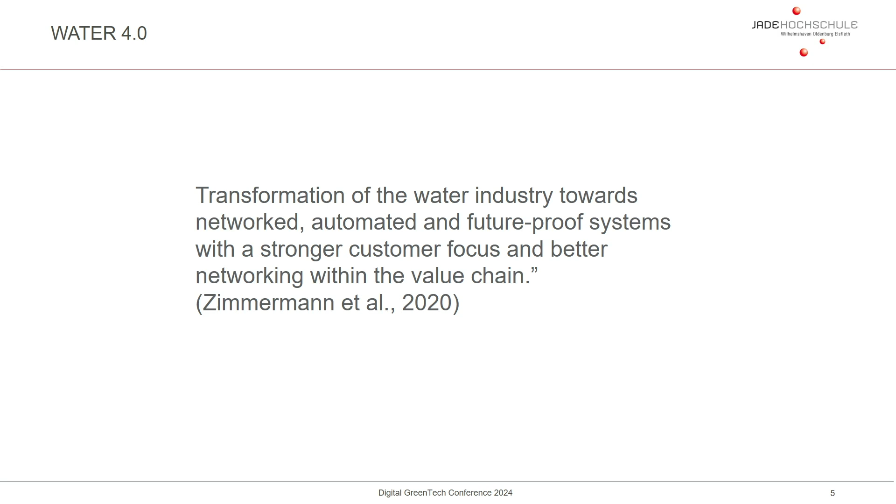And why do we talk about digital transformation of those urban water systems? Let's see a short definition. It's often talked about as water 4.0. And it is the transformation of the water industry towards connected systems, towards digital systems. And the idea is to have a stronger customer focus, to have better networking within the value chain. And the goals are to have a better linkage between plant processes, to have better speed, to consider all resources, personnel, material, and support processes, all towards the goal of having better environmental technologies.

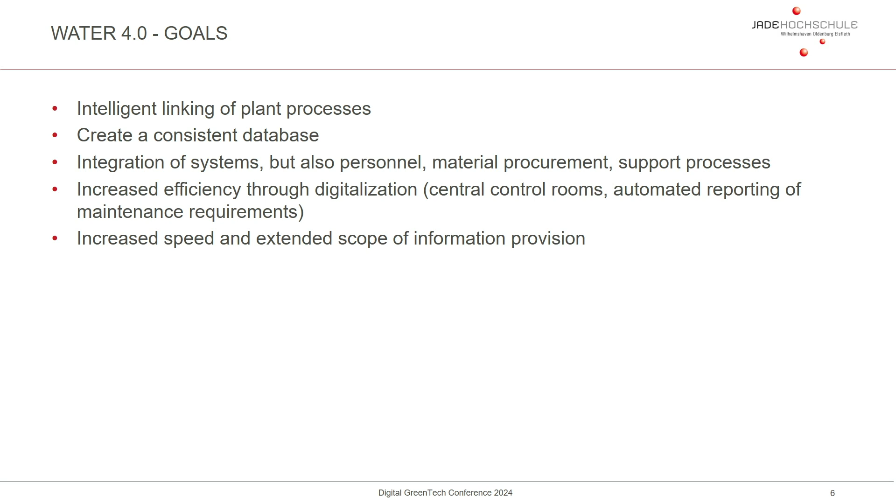And there have been some research activities going on to measure these effects and to see how is the state of the digitalization.

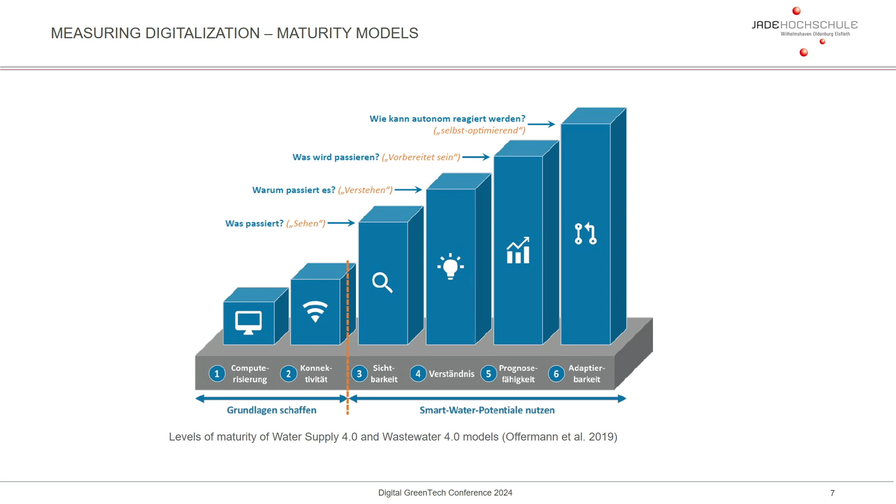And there are the so-called maturity models which were developed in 2019. The idea is there were several steps that could be achieved. First was simple computerization, and in the end, the last stage would be adaptable, self-optimizing systems. What was found, the status quo in 2019, was that the average level of maturity was somewhere between 2.6 and 3.2, shown here with this orange line.

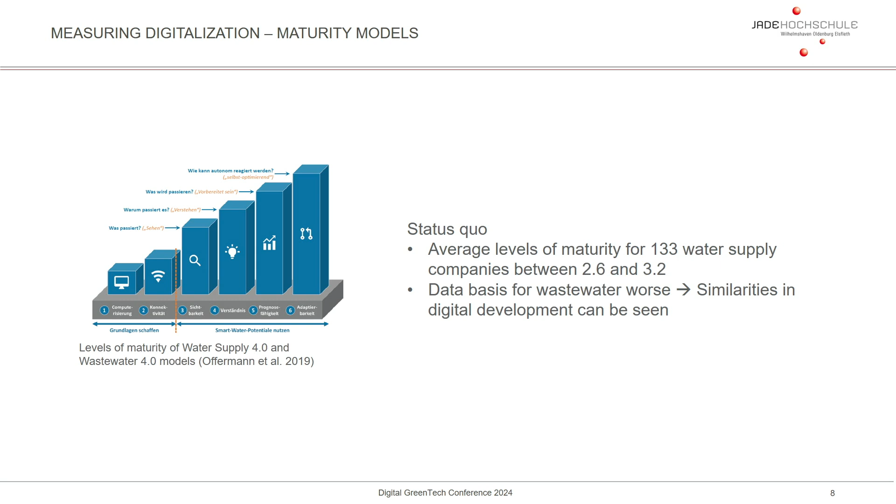It's in between connectivity and being able to see the data. So this was 2019, still some years ago, but we see until having self-optimizing systems, there's still a lot of work to do.

At BWB, back then, I was able to join one project of the first Digital GreenTech call. It was called Blue 2035. We started in the middle of 2021, and I was only able to join this project for 6 months because then I went to the Jade University of Applied Sciences and left the Berliner Wasserbetriebe. But they continued the project and had some nice results that I wanted to show as an inspiration.

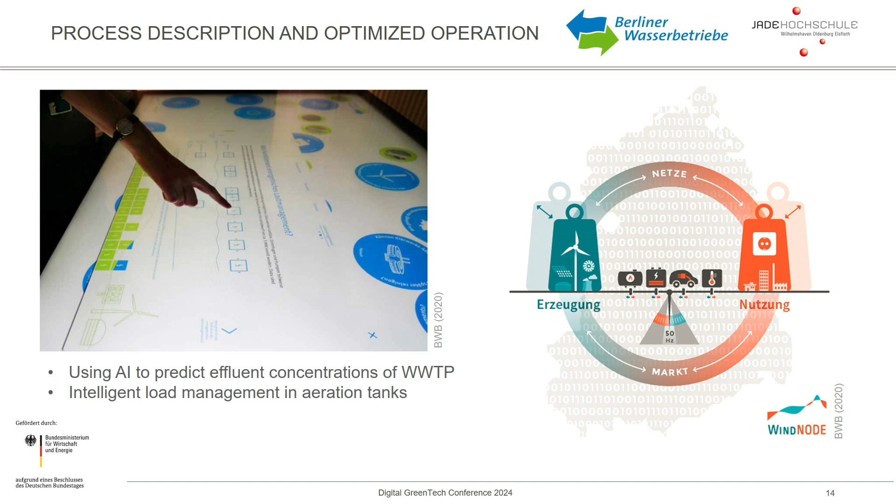In the research project WindNode, we focused on how we can predict with AI, so machine learning models, ammonium effluent concentration at the wastewater treatment plant. The idea was to use this for load management, to reduce energy consumption in the biological treatment stage of the wastewater treatment plant, and to have flexible loads and save energy when it's needed somewhere else.

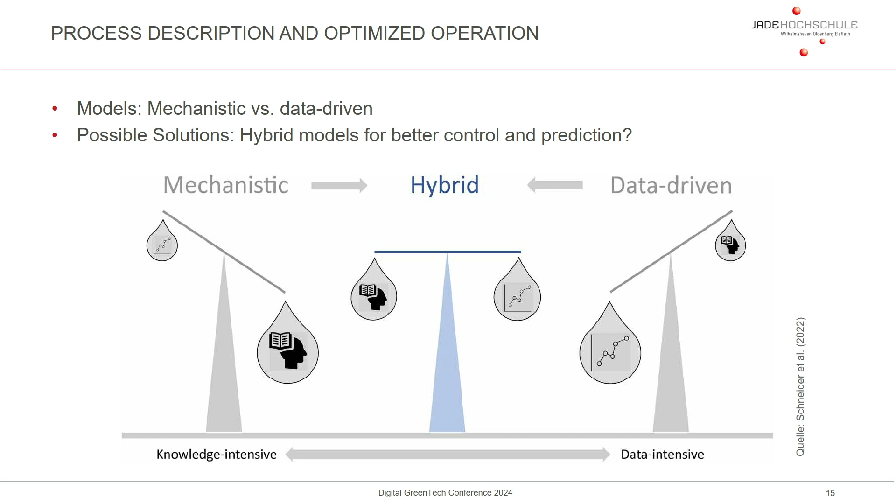We used these AI tools, machine learning, and had some nice predictions, but the research has gone on since then. A current trend I wanted to highlight is: on one hand we have mechanistic, process-based models for wastewater treatment processes, and on the other hand machine learning models. Now there is discussion on how we can join them, how we can create hybrid models to get the best of both worlds—knowledge-intensive models on one side, data-intensive models on the other—and how we can connect those to get better wastewater treatment.

And then BIM—it's always a topic, what about building information modeling? I went to the Jade University of Applied Sciences, I'm in a faculty of building systems, so I work a lot with civil engineers. And all of them, if they talk about digitalization, digital twins, they are talking about BIM models. For me, often a digital twin has been a process model.

So the idea was, how can we connect those two topics, two ideas of the digital twin? Especially if we look at building information modeling in the water industry, it still hasn't gotten wide application at the moment. Everyone is trying to implement those systems, but wastewater utilities focus a lot on the operation phase. They sometimes question why they should implement BIM models if they are focused on the building phase, because the building phase is just a short amount of time, and then we have this whole operation phase—where can I use these models in the operation phase?

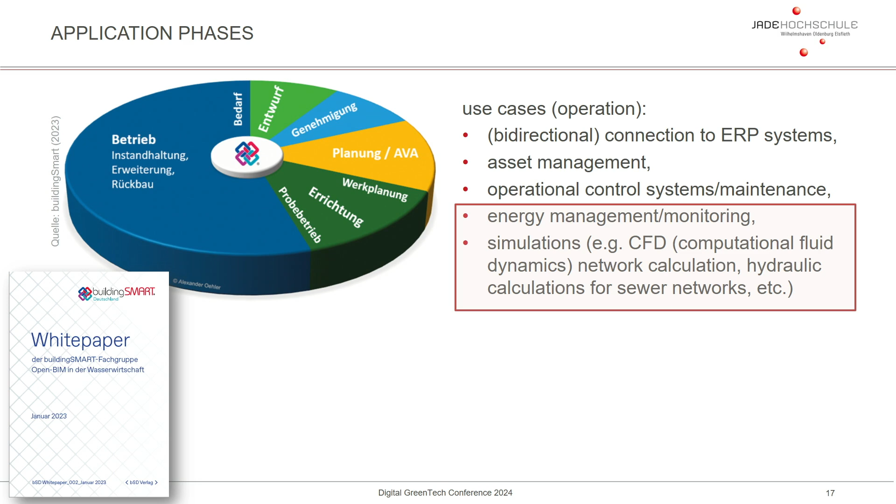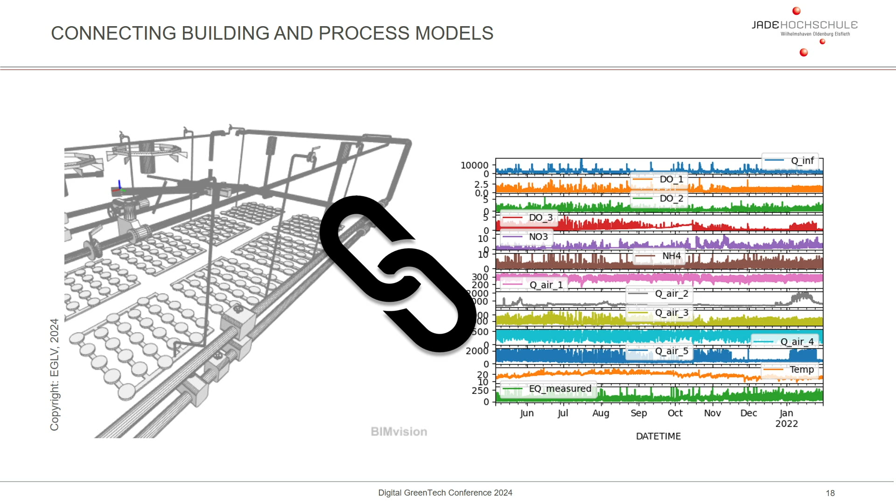They mentioned energy management, monitoring, simulations, CFD simulations, which I did in my PhD. So I thought this might be interesting - how can we connect those two things? I have a very nice colleague, a professor for BIM, and we are currently trying to connect those two worlds to get better outcomes, better digital twins, by combining the building model and the process model.

And then something about the assessment - what can we do with these models? What are the chances and the challenges, as I highlighted in the title? First of all, we have innovative technologies. We also hope there is a positive environmental impact, that we have better effluent values, that we have energy savings. We also hope there is a workload reduction.

But I put this in brackets because at the same time, we find now that the workload reduction also comes with the need of upskilling. So we need to upskill our personnel, we need to show them how they can use those digital tools, and in the beginning, in the implementation phase, it's sometimes more work than saving work.

And also the environmental impact we need to keep in mind. And there are some other strengths: increased efficiency, sustainability, forecasting possibilities that we hope we get from those models.

But on the other hand, we have some risks, some weaknesses. First of all, some ethics concerns. We have regulation - the new EU AI Act is something we need to consider - and possible rebound effects.

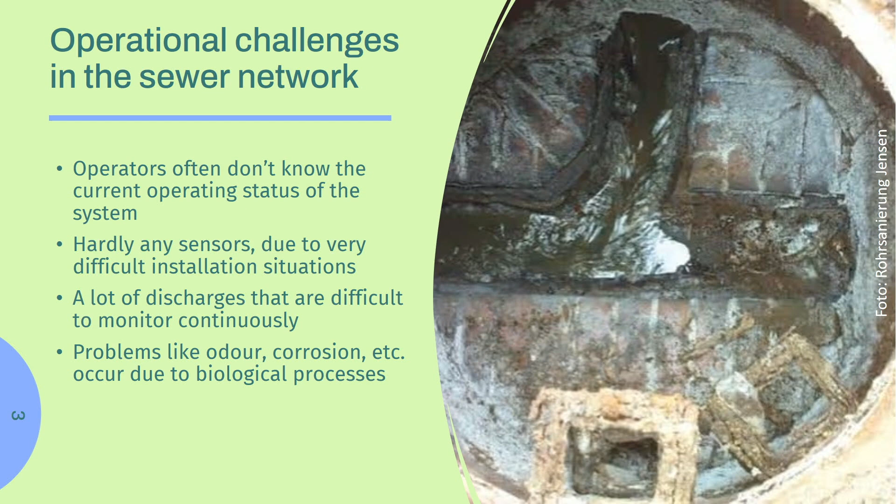To tackle these challenges, within the Live Sewer project, we developed the idea to have some kind of automated monitoring system. We tested the system at sub-catchment areas in the city of Rheine, in the Münsterland, and also in the region of Emscher-Lippe - this is where I come from.

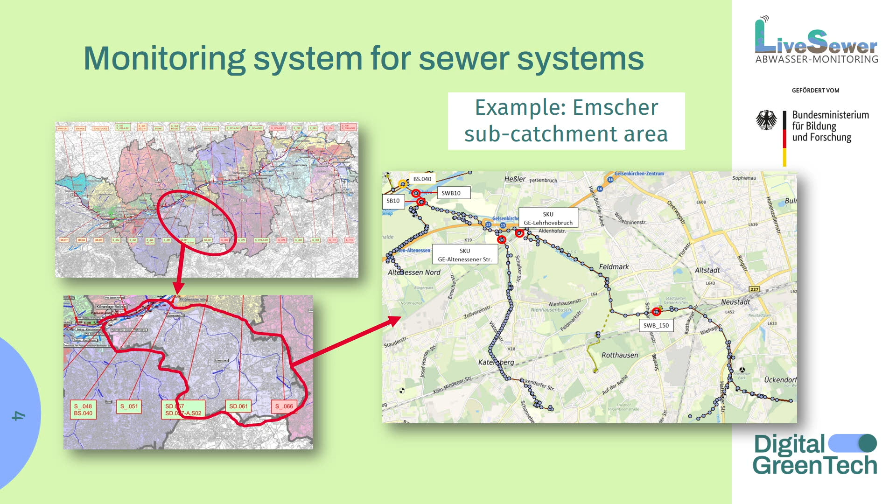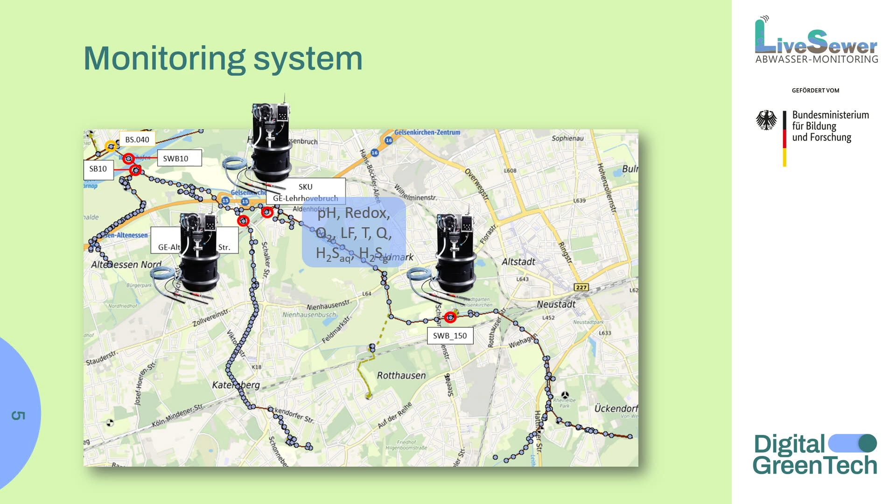For that purpose, sensors have been installed at certain points of the sewer network, where standard wastewater parameters are measured continuously. This data is transmitted to cloud-based storage systems, where it's available for intensive data analysis. This data analysis can be used, for example, to trigger specific processes within the sewer network, such as sampling or the dosing of chemicals.

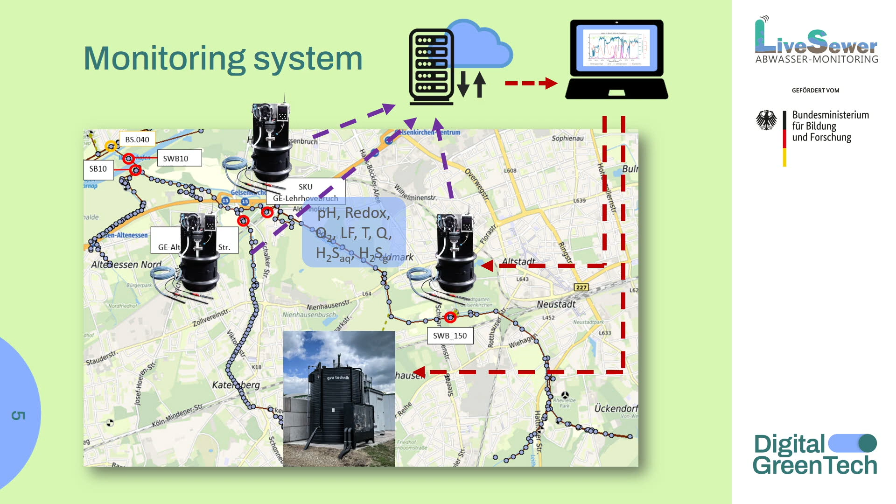Actually, we are working on data analysis for the following applications. First of all, we call it discharge surveillance, which means that through automatic recognition of patterns of the measurement data, 24/7 monitoring is possible. This can be used for detection of anomalies, but also for identification of selected discharges by fingerprints of combinations of different parameters.

The other field of application is the forecast of hydrogen sulfide emissions in the sewage, and maybe as a perspective also the control of this type of emissions. In a later stage, we will transfer the experiences of the other two applications to improve risk management concepts for water reuse, which is a topic of the future, we think.

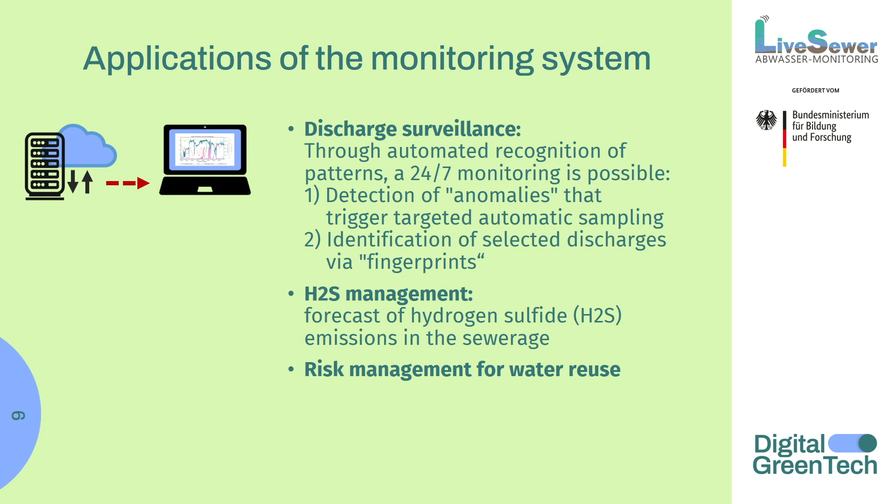If you operate such an automatic monitoring system, you get data bundles like this. They are influenced, for example, by the time of day or by weather conditions or by other effects, which are easy to see. But if you try to get more detail, it's more or less not possible to identify specific patterns between all the parameters.

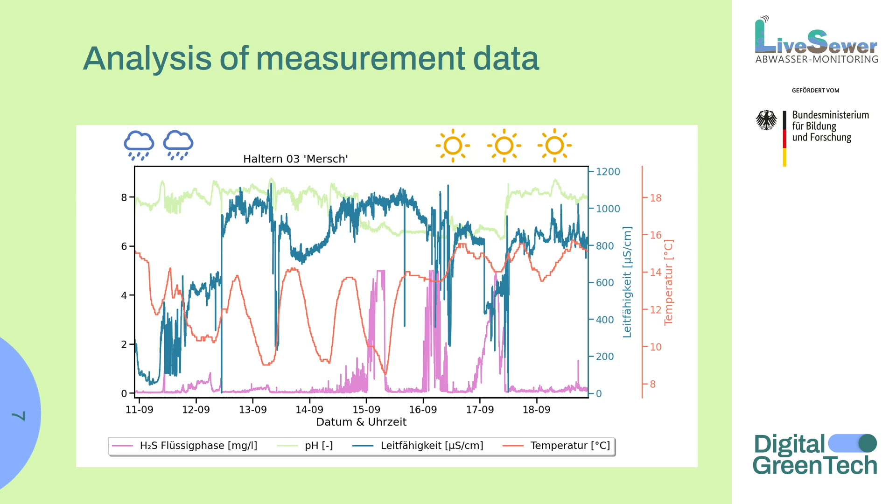Therefore, we currently try to minimize the number of parameters to be measured to those that are really relevant. And on the other hand, and that's the main part of the project, to support the data analysis by AI algorithms.

There are some more lessons learned during the project. I just picked up two of them. One is that it's very important to ensure synchronized measurement data, especially when we have sensors of different types for different parameters at several measuring points. The second is to do everything digitally, even documenting operational interventions like maintenance of sensors, because only if it's digital is it possible to process them by the algorithms.

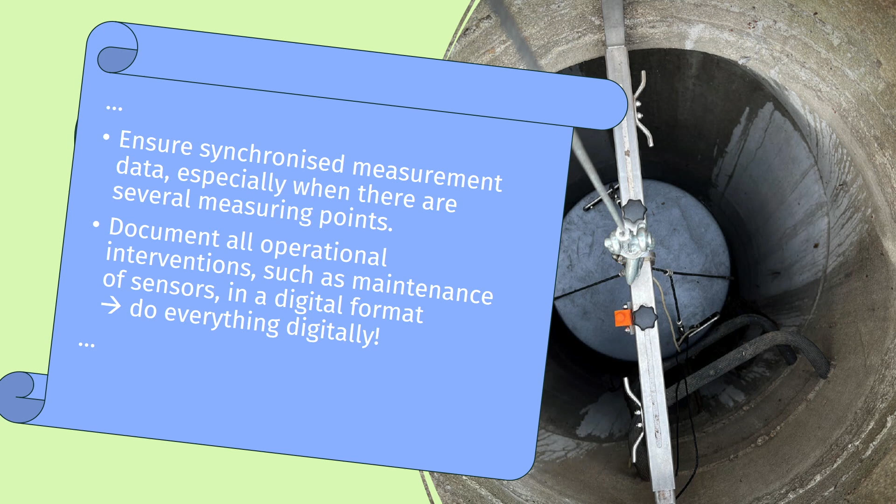By doing this, we are confident that we will develop a useful monitoring system, which opens up several interesting options for further applications. So, thank you very much so far, and I'm looking forward to your questions.

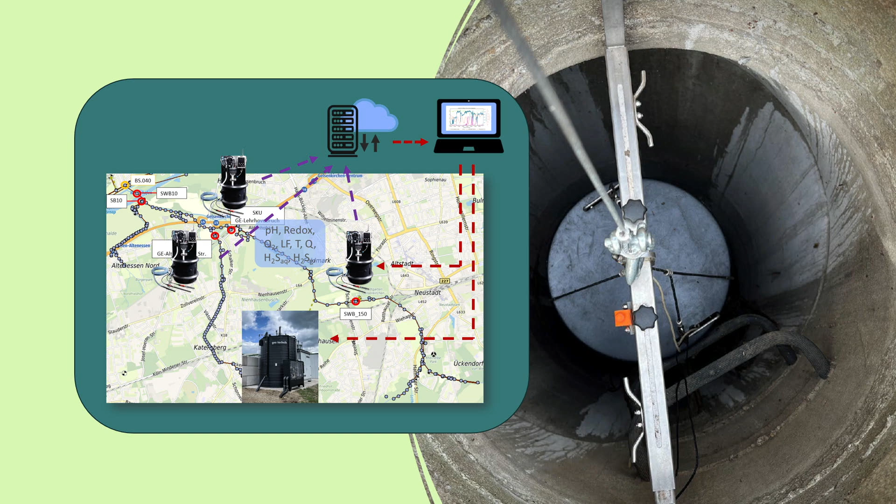Yeah, thank you very much for the introduction. Coming from the wastewater before the treatment process to the end of the wastewater treatment process, which is sewage sludge, different sludges on wastewater treatment plants. We want to assess in our project the quality of sewage sludges via a soft sensor approach.

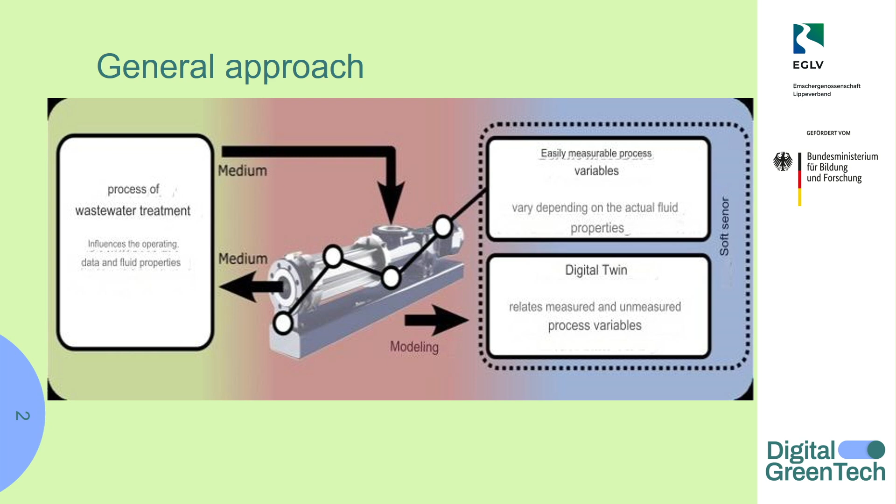Just a short reminder, we are implementing the soft sensor in pumps because you have pumps everywhere on wastewater treatment plants. You have to pump the sludge, you have to pump wastewater, you have to pump different other liquids. So the idea is to use the data of the pump, like pressure, temperature, power consumption, to gain information about the properties of the fluid that is pumped.

So just a short reminder, one example is the polymer solution. Polymers are needed on wastewater treatment plants for sludge dewatering. You need it on every wastewater treatment plant. So there's a wide approach or use cases all over Germany.

Usually the polymer solution and the concentration of these polymers used for sludge dewatering is not measured. You have the polymers, you dilute it with water, and then you add it to the sludge for the dewatering. Usually this is not controlled, so one of our three approaches is to use the soft sensor for an online measurement of these polymer solutions. This means having an online concentration reading of those polymer solutions during operation.

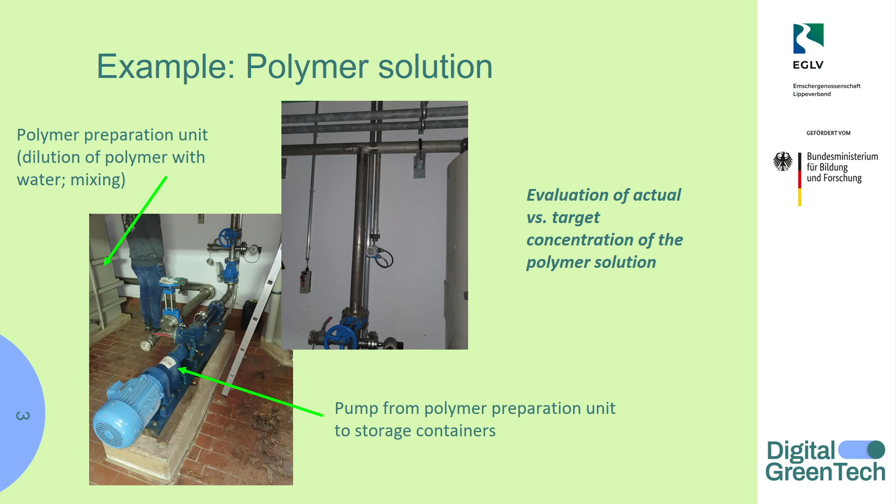Before going on a real wastewater treatment plant, we are testing the soft sensor in the laboratory. Our project partner SEEPEX has a laboratory pump where everything can be done under lab scale conditions. This means you can add a specific liquid in the pump. You see the pump here. You have all the data evaluation.

Before using this system for real sludges and real wastewater, it is tested with artificial substances, like water with bentonite to simulate sewage sludge, and water with polyethylene glycol to simulate the polymer solutions. And having this data in lab,

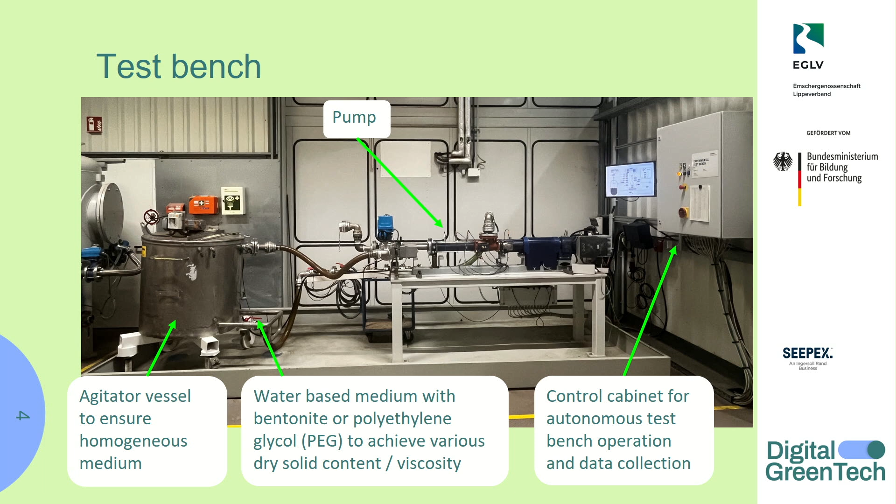all the pump parameters are assessed in lab scale. So we have different pressure sensors on the pump. We have the data from the electricity and the power consumption. We have temperature sensors, and all this data is assessed in lab scale before we go with this idea on

full scale on wastewater treatment plants. And of course, all this data has to go into mathematical models. And to explain what happens on the mathematical side, I will give over to Julian from the University of Bochum for the next few slides.

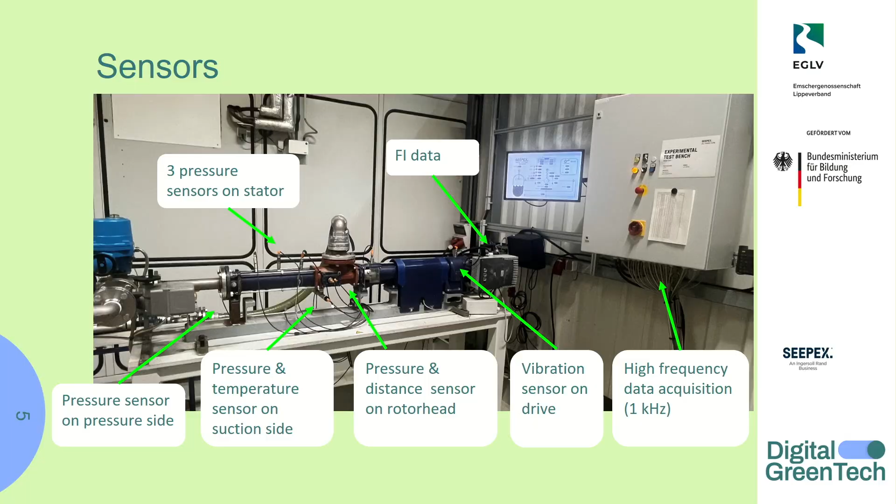Yes, and on this slide I try to sum up what the physical properties of the used pump are and what the aim is that we desire. So basically what we have is a pump, and we try to model this pump in a pretty simple way, just to have a digital twin, to come back to Mr. Olber. This is our understanding of a digital twin: basically to have a mathematical model that takes input parameters or input states and produces some outputs.

In this case, it is the tilt of the rotor, basically the dynamic behavior of the rotor itself. And as you can see, we have some dynamics that we can measure, for example the torque dynamics with the frequency inverter data. And this is basically what happens inside the pump.

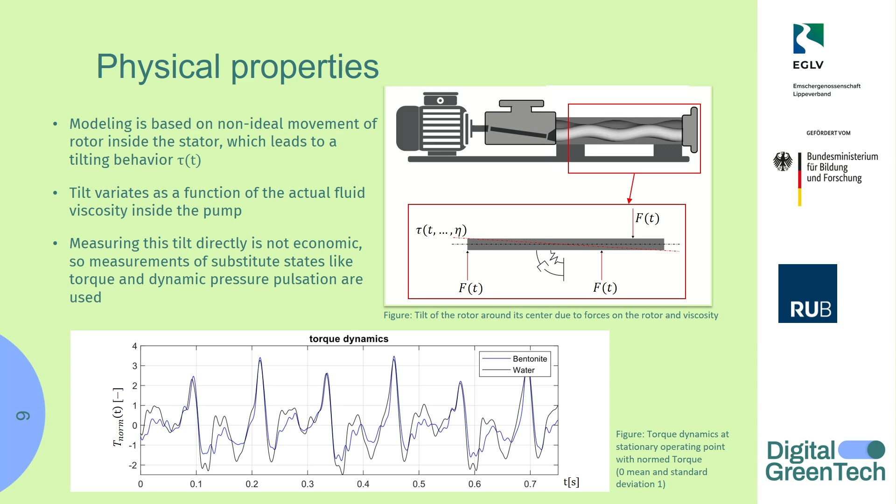We try to put this into a model, on the mathematical approach, using this kind of relationship. And what we try to do is select the number of states sufficiently small to guarantee real-time feasibility, to have a so-called observer to estimate the total solids on a real-time basis.

Because it's always hard to model this kind of system, we also create a data-based model, coming back again to Ms. Teuber, to have a hybrid digital twin that catches all the dynamics that occur in the real plant.

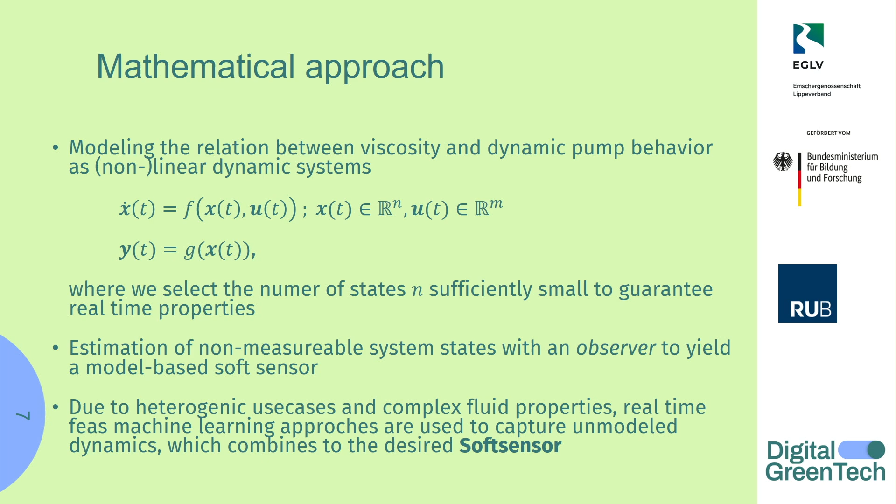All right, that's it with Softsensor. And if somebody has questions, I prepared a poster, so maybe just come back to us. Thank you.

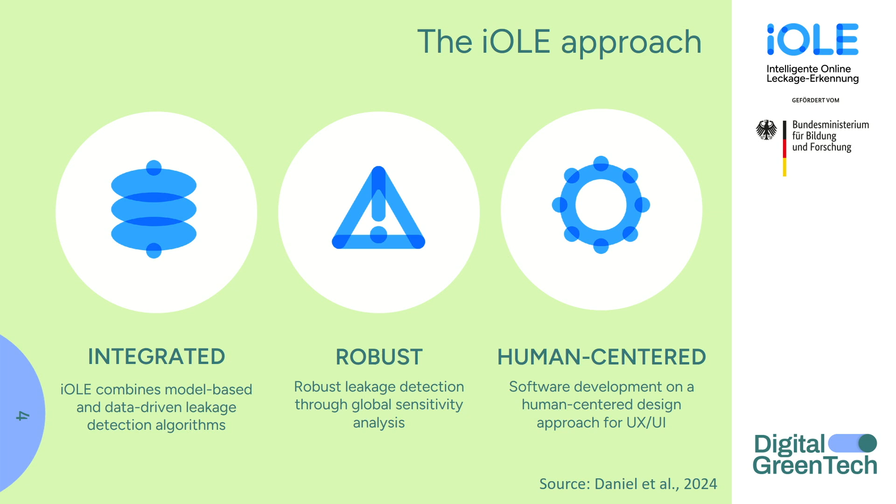In our platform, a digital platform for leakage detection, we integrate 2 state-of-the-art models.

We've been further developing two models in the last year, one developed by us at TU Berlin, the other at KWB. The two models have a really strong difference in philosophy and rationale, but at the end of the day they aim to provide similar outputs: identifying when a leakage is occurring, and in one of the two cases, also where the leakage is occurring. So they reply to different requirements and needs by water utilities. Altogether, they can contribute to a more robust and accurate solution than just one of the two options.

Robust. We want algorithms that work under different circumstances, so we've made an effort to classify all factors that could affect the performance of our algorithm. We classify them as aleatoric uncertainties, which are a bit more outside of our control, like the leakage scenario and the type of network or system inputs, and epistemic uncertainties, which are factors that the water utility, maybe with a longer term, can also control, like measurement quality of data, hydraulic parameters, and the parameters of our algorithms.

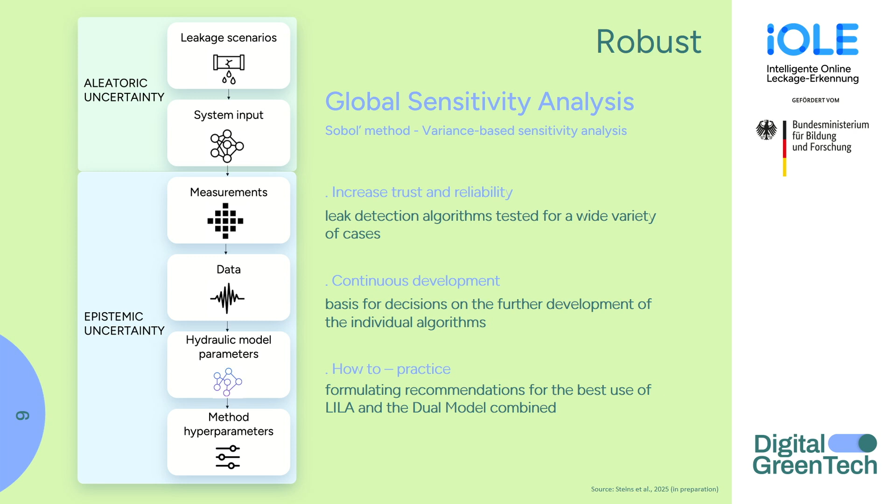We are assessing the effect of all these factors on our algorithms with a global sensitivity analysis, so that we can provide utilities with actual insights on where they could change things in such a way that the resulting leakage detection is more accurate and trustworthy.

Finally, and for this presentation, probably the point I wanted to highlight, because that's where we're investing a lot of our effort, is really making this solution usable to water utilities.

We started in the first year of the project with a market search, so we organized a structured analysis of which players are in the market. Leakage detection is actually a very active market. We saw 45 relevant startups, most of them software-based, many claiming or stating they use AI in different ways, and also relevant utilities that may be interested in engaging.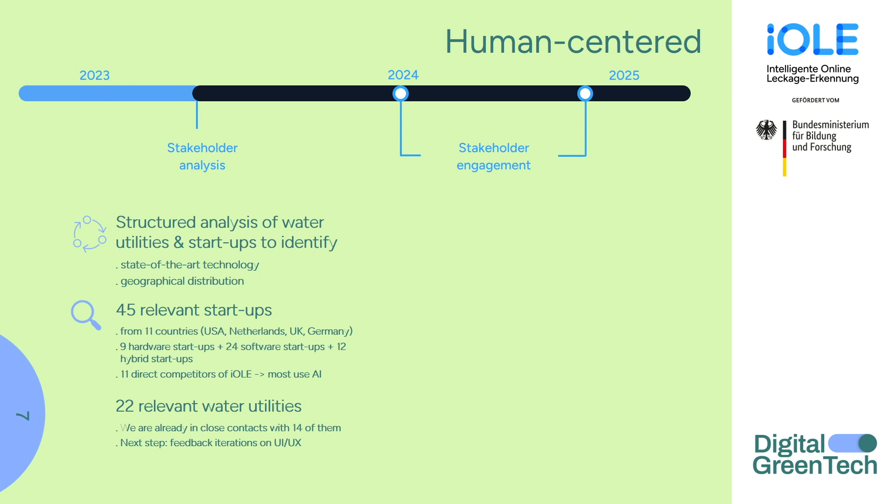In what we are planning now, we have already started interacting with some of them, where we're really seeking their input, stakeholder engagement. We don't want to just develop the next leakage detection solution. We want to develop the next leakage detection solution which they can use, which they like, which they feel comfortable with. So we started with a mock-up of the user interface, based also on some feedback and interactions we had early on with some water utilities.

We're now pushing this to the next level, where we start really a round of feedback with water utilities, to really have it displayed not really what we want, but what they think is useful for the actual application.

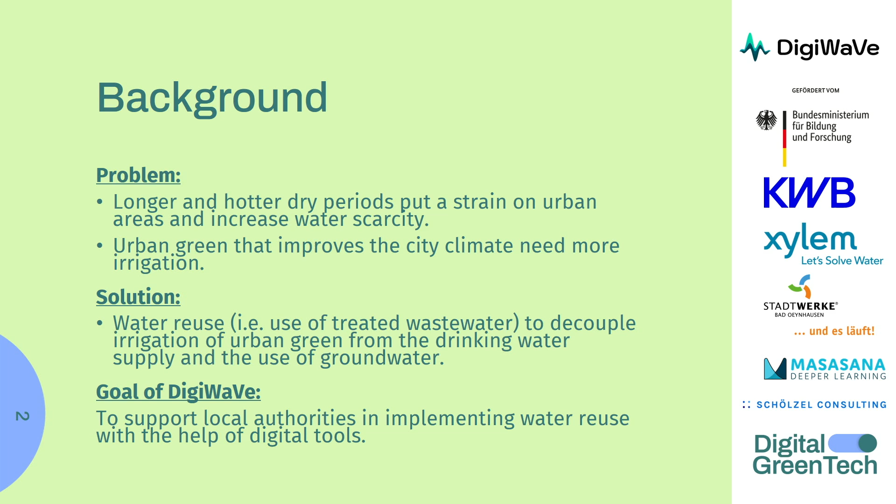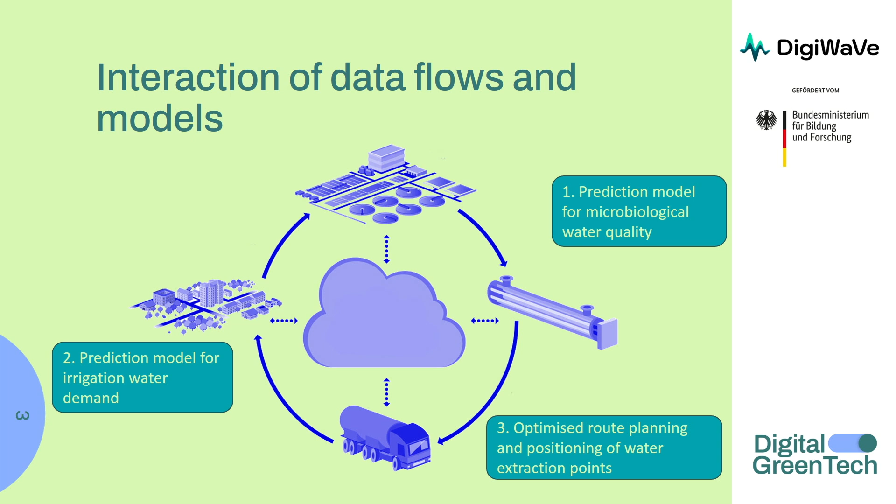So, oh, no, that's the wrong direction. Ah, this one. So, we have several elements here. One is about a prediction tool for the microbial water quality upfront to UV disinfection. Then the question is how much water is needed, and where in the city area? And then also, when we would have to deliver the water in the city, it's about route planning of water trucks, or maybe even if we would have a pipeline, where to extract the water from the pipe to reduce the demand for long-distance transport within the city. So basically it's all about reducing the effort for those managing the urban green.

So, data acquisition. First, let's have a look at the microbial water quality prediction. This is existing in full scale. So we have our wastewater treatment plant. It already has a dual media filter and an activated carbon filter to remove pharmaceuticals. And this is then where we start.

We installed a UV disinfection pilot plant, and then we take a lot of samples, like lab samples, but also a lot of online sampling from the wastewater treatment plant, from the treatment processes.

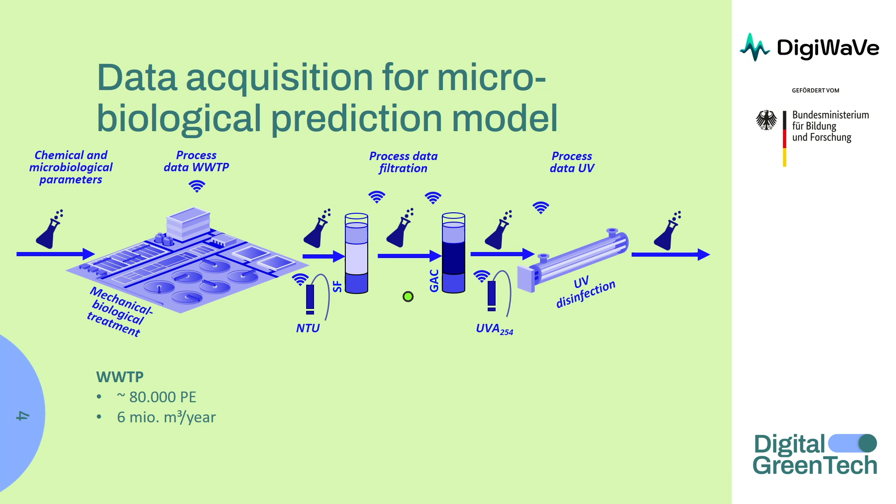Here you can see, for example, we need factors like turbidity, UVA, all the nice water quality parameters. We also installed the at-line E. coli monitoring, so each, let's say, 6 to 8 hours we get also a value for E. coli to train our model.

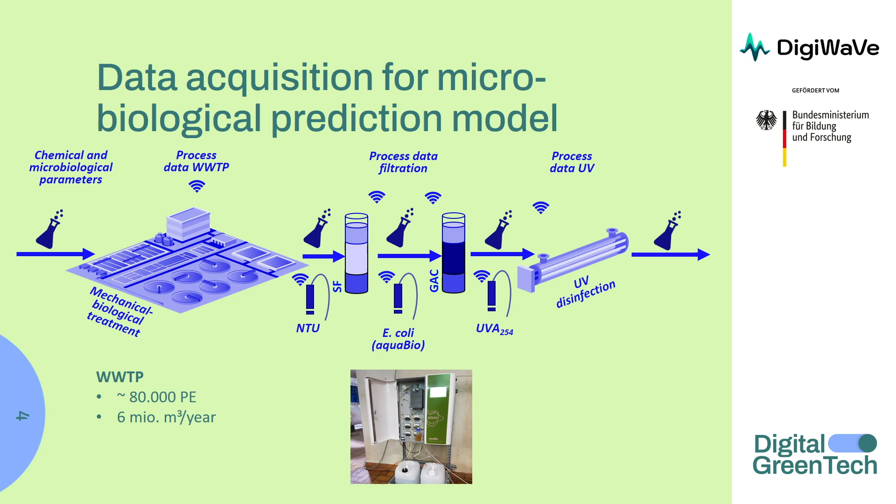And then of course some results. This is more the classic water quality parameters you need for water reuse, so these are all fecal indicator organisms such as E. coli, enterococci, coliphages, or Clostridium perfringens for the different types of risks you have in water reuse.

What is now interesting for us is we want to predict the E. coli value before the UV disinfection, because at the end we want to make sure that the UV disinfection always reaches a value below 10 E. coli per 100 milliliters, while we are starting, well, in the entry by more than 10 to the power 6.

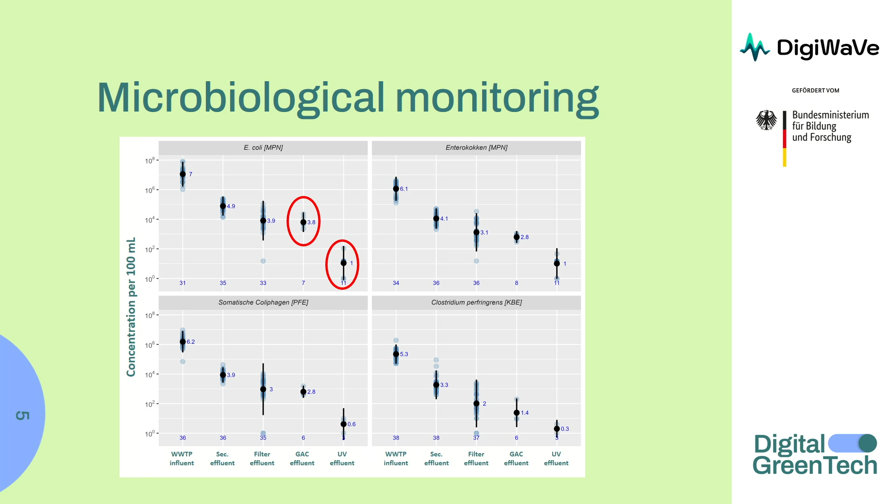This is where one of the models is targeting, and this model takes into account different factors like the flow in the wastewater treatment plant, the turbidity in the effluent, temperature, but also conductivity of the water. This is then modeled, and we use especially this online device to get a lot of data as a training data set.

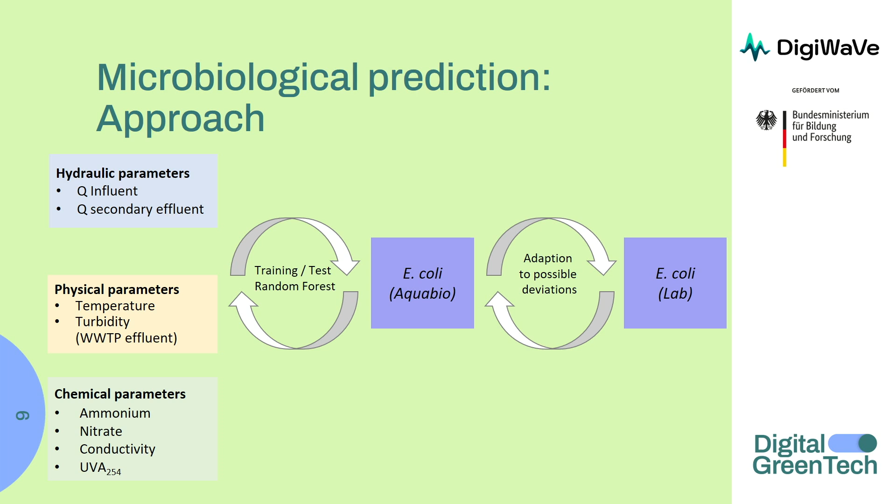Using a random forest model to train this, but also to check against actual lab data. So this is important to have this lab data, and here you can see... oh, this was the wrong direction. So here you can see...

This is quite sensitive, huh?

Well, that's basically where we are, and now the next step is, of course, to figure out how much energy we need for the UV disinfection.

One more slide. This is one part we are still working on. Here it's more challenging, because what we want to do is basically predict the water demand in the area. And currently the state of the art would be to measure the soil moisture.

This is what you can buy on the market, but this requires that you put a lot of sensors in the city area. The idea is to use mostly open available data, for example from the German Weather Service, to predict the soil moisture.

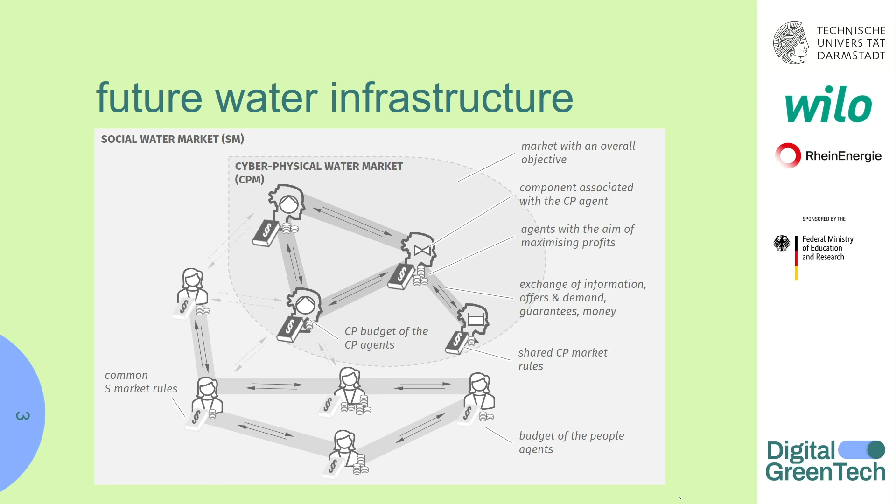With Agents for Water Markets, we are again back at drinking water. As the name suggests, we are looking at water markets and agents. The first water market involves water consumers and water suppliers, which we both consider as agents in our project. The second water market is the cyber-physical water market, where we look at the technical system of a water distribution network, where all components like pumps and valves are connected to or represented by agents. With this project, we want to establish a path to future water infrastructure, which from our perspective needs to be sustainable, resilient, and fair.

In the following, Mr. Glück and I will explain how we address these obstacles in the project.

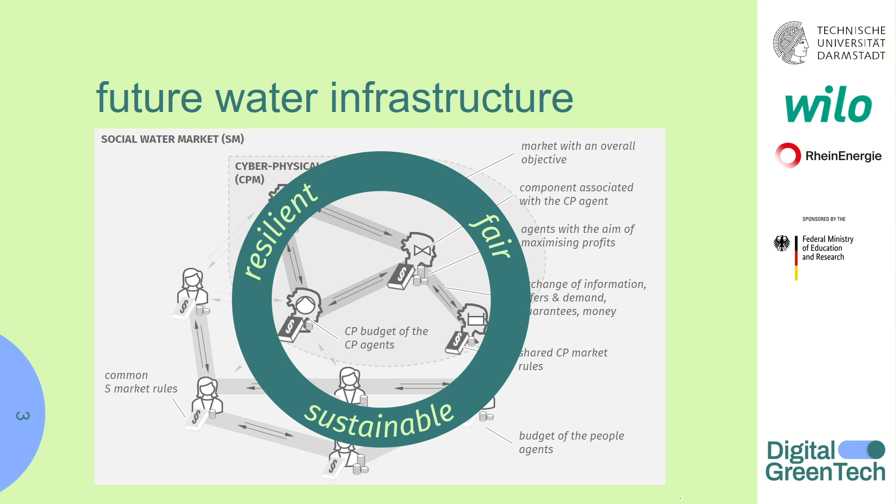Let's start with resilience. What we're seeing here is a simple water network consisting of pumps and valves. Basically, there are two operation strategies for such a system. Either there's the centralized option where all components are connected to one controller, meaning the system can be operated quite energy efficiently, but it requires a lot of effort during setup. Or you can operate with local controllers, which is basic and less energy efficient.

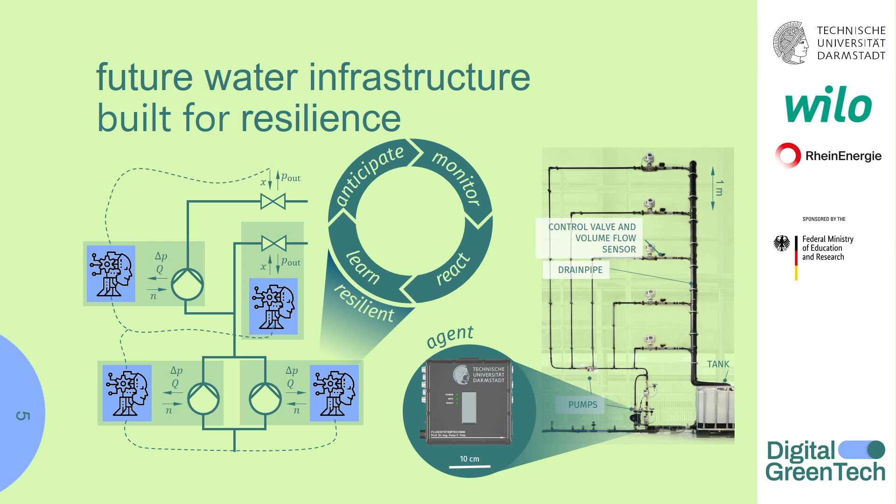With Agents for Water Markets, we combine the benefits of both strategies in agent-based control, where each component, every pump and valve, is connected to an agent. Via communication between agents we ensure cooperation. When an agent is able to anticipate, monitor, react, and learn within such a system, we can ensure that operation remains resilient. In practice, we investigate such systems at a test rig, where the agent is mainly based on a microcontroller, and we are testing different communication protocols for these agents. Mr. Glück is continuing with sustainability and fairness.

Another key aspect we focus on is sustainability. To control a hydraulic system sustainably, we need to be efficient. Today in the keynote we heard that efficiency is not enough—we also need to be sufficient. So the key here is to supply only as much as there's really need for. Also, for the control system to be sustainable, it's necessary that it's adaptive, since the environment is constantly changing.

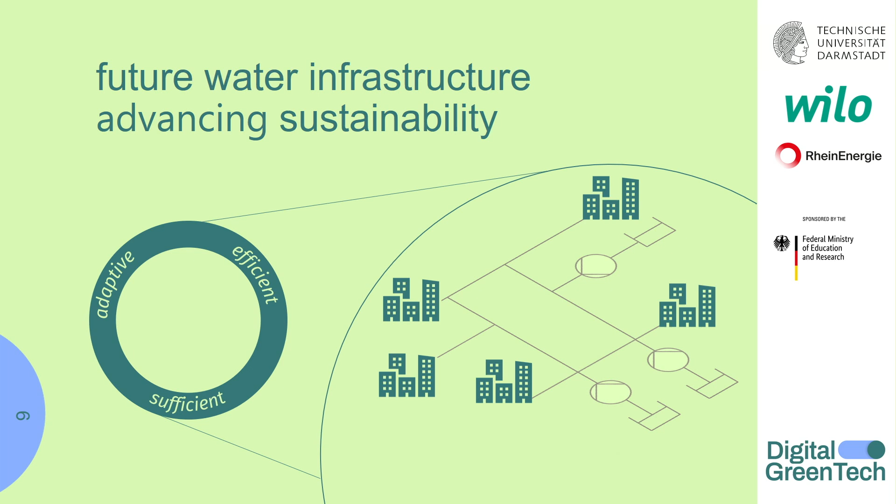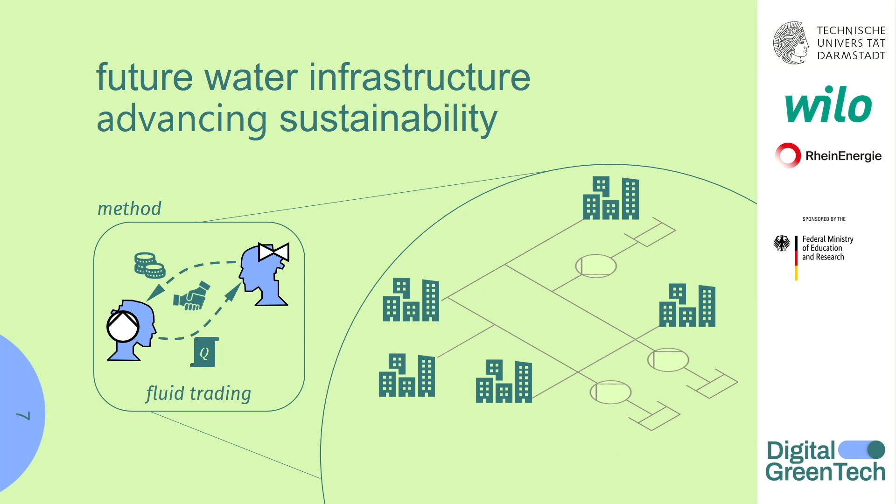How are we going to do this? We have introduced an environment where each agent can trade and negotiate with each other and autonomously find the most beneficial solution for the complete system. For this method, it's necessary that all negotiations are transparent and fair, so we are also investigating different pricing schemes to allocate the resource effectively and efficiently.

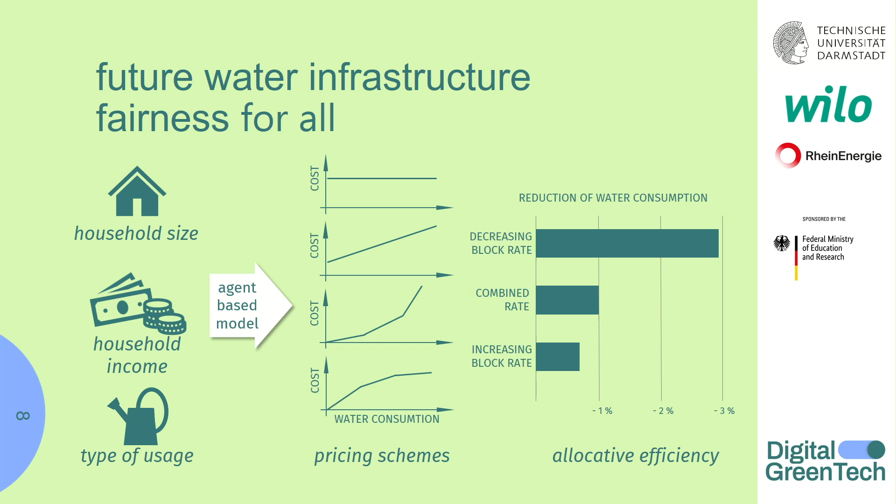We have categories, for example, that will be fed into the agent-based model, on which we can try to make the allocation fair. If this sparked your interest, you are invited to our poster to ask your questions. Thanks.